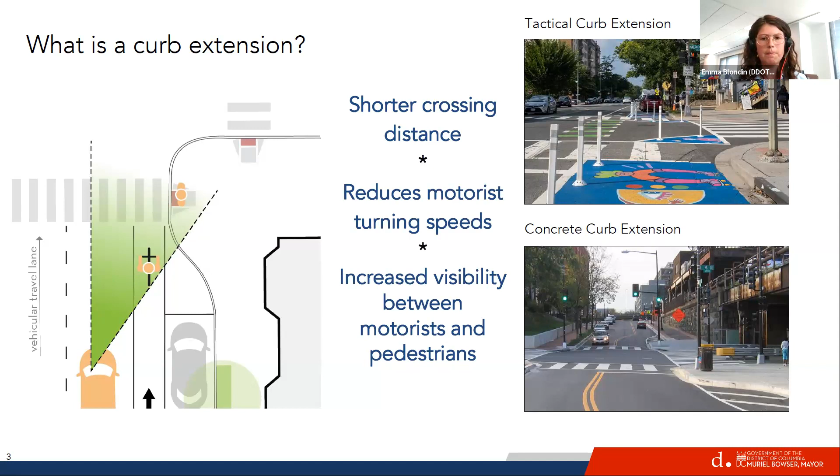We use tactical safety improvements in general, and curb extensions, because we're able to realize the safety benefit quicker, and it improves the planning-to-construction timeline, which I'll talk about shortly. It also gives us an opportunity to right-fit the designs and make changes before we go in with a permanent installation.

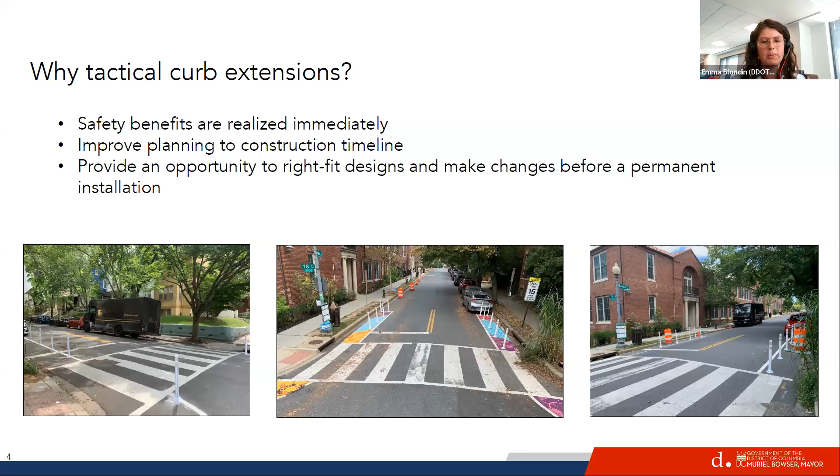So we have these safety and mobility studies, which we do in all different areas within DC, at our smallest local level, where we look at locations on neighborhood streets that can benefit from safety improvements. These are quick, short studies where we recommend a variety of safety improvements, mostly at the intersection level. With each study, we look at 40 short-term recommendations that we implement within 3 years. 10 of those we implement during the study. And a fun extra benefit is that 5 of these immediate installs, we work with local artists to install murals within those curb extensions.

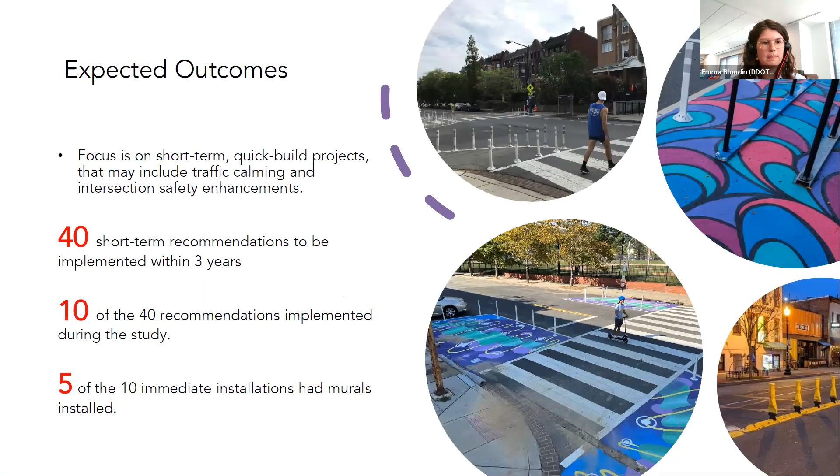And these are all quick-build pieces. So we really message these studies as ways to quickly improve safety along these local streets. These aren't large visioning studies—these are quick studies that identify needs within our streets that we may be able to come back later and upgrade. So they're all created to be tactical installations.

Some of them were able to go straight to concrete, but for the most part, what you see here is what these recommendations end up being: flex post paint, modular speed bumps, signage. One of the big things is bringing all of these intersections we touch up to standards—making sure parking is 25 feet from the intersection, so we're daylighting the intersections. We're making sure we have all the ADA ramps we need, high visibility crosswalks, and other pieces within our design and engineering manual.

Incorporating tactical installations in our planning process allows us this extra step. Looking back at what we used to do, it goes planning, design, and construction. From your original plan and the community engagement, it can be 3 or more years before you actually get to installation. So by incorporating the installation and design piece as part of the planning process, we're able to get to...

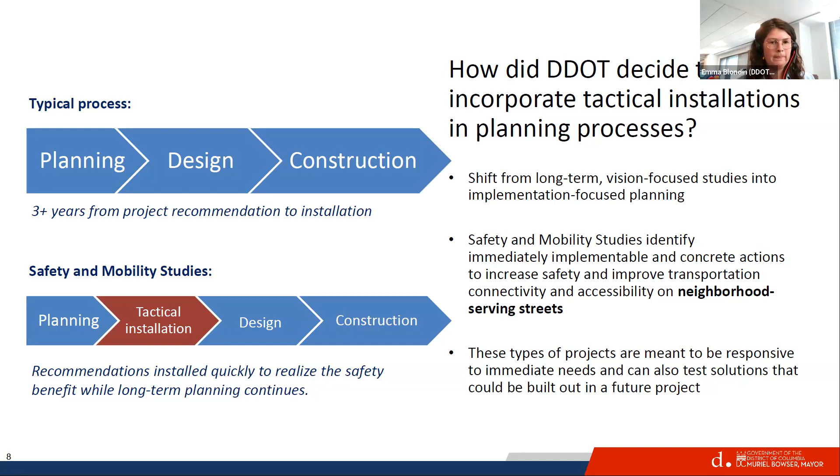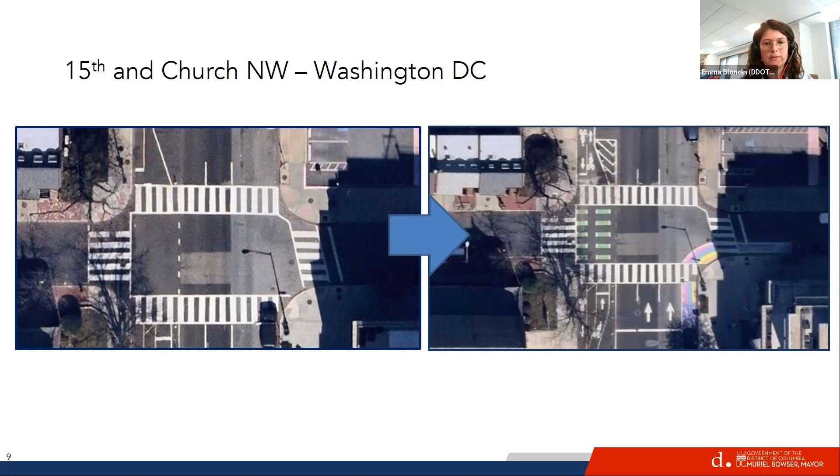In the intersection, we added puppy tracks for the cycle track. This cycle track is one of our oldest in the city, so bringing that up to standard and providing more signage, which you don't necessarily see in this image, and then curb extensions to shorten the distance for pedestrians to cross.

This is another intersection. We have a lot of not necessarily teed up intersections because we have lots of avenues that separate out our grid. One of the key things we do is try to tee up the intersections, which you can see here.

One of the main things that helped us succeed with these studies is incorporating the design process in that planning. So we found a consulting firm that could help assist us with the planning and the design. As part of the deliverables for the safety and mobility study, we had them develop plans that we could pass off to our contractors when we were ready.

That allowed us to install this because we were, as an agency, going and repaving this street as part of our asset management process. As we go and repave it, we had the plan ready, so we were able to execute immediately and upgrade this intersection because we had the plans ready to go. I think that's one of the main reasons we've been able to implement these so quickly, just being one step ahead in the planning process.

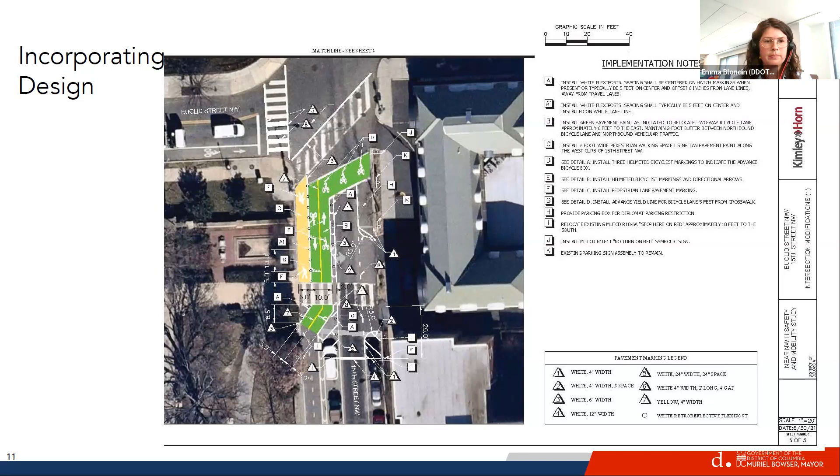You can see here the before and after. This is actually an example that a resident had brought to us, this is a park, an NPS park that didn't have a sidewalk next to it. So we were able to do a tactical sidewalk, and almost immediately people were using that rather than the cycle track to access the park.

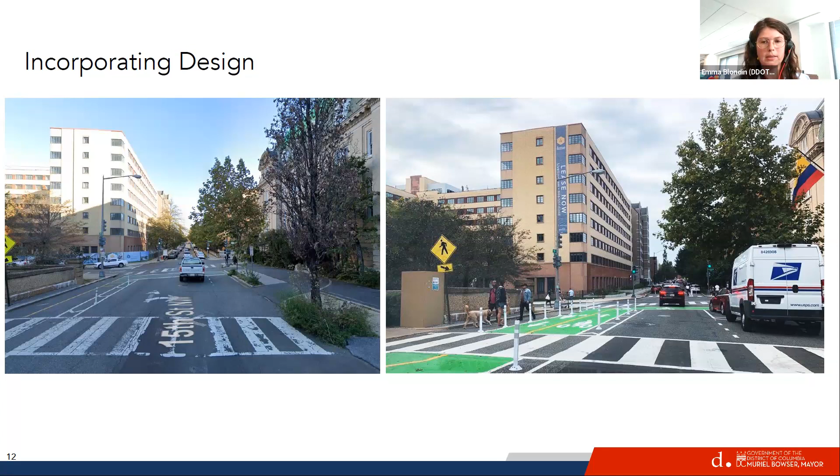After the safety and mobility studies and we install these tactical safety improvements, we realized, as we go to the community and install these, we always say we'll come back with a capital project and harden these tactical safety improvements. But the reality is most of those streets don't get capital safety improvements because these are local streets, local intersections. So we realized we needed to find a systematic way to identify the locations we could upgrade to concrete. That's our Vision Zero hardening program.

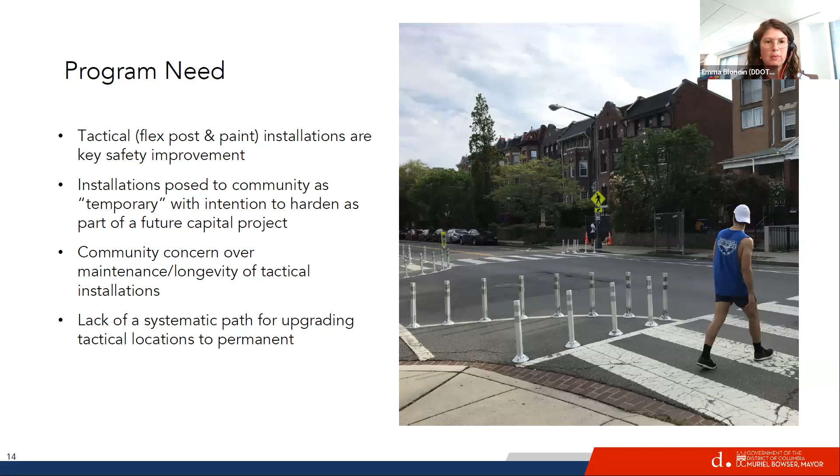This is kind of some of the things I've already mentioned, where we identified over 400 locations where we've put in these safety improvements. We know they provide the benefit, but we're getting more and more community concern over the maintenance and longevity of these. As you can see, some of these flex posts have seen better days. So being able to find a systematic path for upgrading locations is something we kind of started tackling in the past couple of years.

It was also brought to us through the council, so we are required to identify these locations, provide targets, and report on how many locations we upgrade. This includes upgrading temporary or typical bike lanes to protected bike lanes, as well as bus islands where we have both buses and bikes on the same corridor. It's really about what materials we're using and how we can upgrade them from temporary materials to more permanent ones.

In 2022, we applied for TAP funds, the Transportation Alternatives Program, to do a study to identify how to upgrade these locations. We really looked at the methodology and how to identify locations that could benefit from the upgrading. They're also assisting us in developing concept designs for some of those locations that rose to the top of our list.

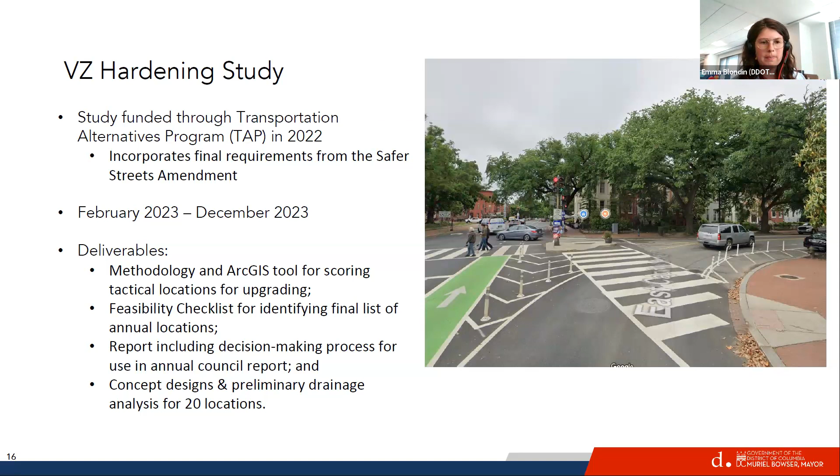So the site selection for identifying the top locations - we have over 400 locations. Each of these intersections gets a score based 50% on the need for safety improvement, and 50% on the benefits that safety intervention will have from being hardened. The safety benefit is already there, but what locations will benefit from us making that concrete?

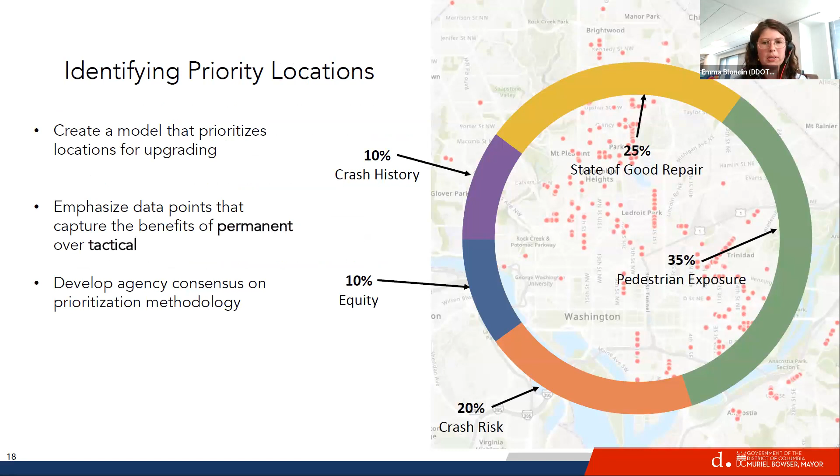These next ones we can go through quickly, because this is just explaining the prioritization score. We looked at state of good repair and pedestrian exposure. State of good repair is really about which locations would benefit from getting hardened based on how old that location is, how old that improvement is, and how many 311 requests we get for fixing the flex posts that have fallen over.

Then we have pedestrian exposure. This is basically trying to get at our pedestrian count. Since we don't really have a good way to count that, we looked at AADT, we looked at public transportation - if there's a metro stop there, that's a big pedestrian generator. We looked at other pedestrian generators as destinations, vulnerable road user destinations - schools, senior centers, hospitals. We looked at trail entrances, and lastly curb to curb width, seeing how long a pedestrian has to cross the travel lanes to get to the other side.

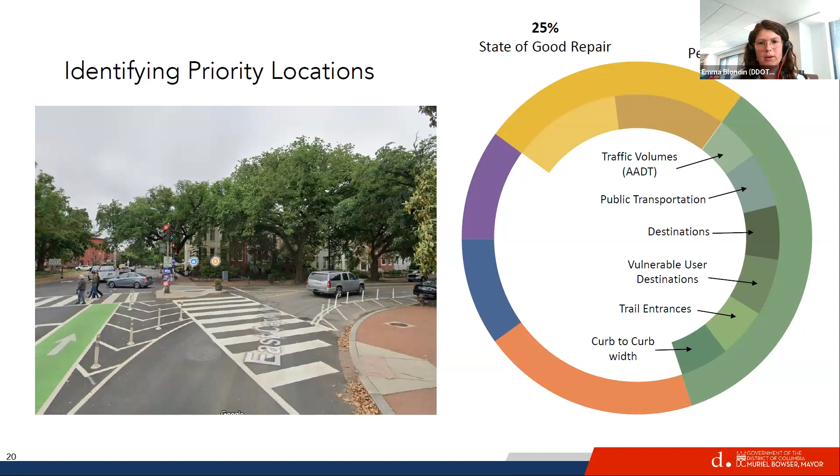Then crash risk is part of the roadway characteristics. So looking at how many lanes of travel are in the same direction, that's getting at the multi-threat crashes, looking at speed limit, intersection geometry - if the intersection's skewed or complex like the one shown here - and then intersection control, if it's a signal, a stop, or uncontrolled.

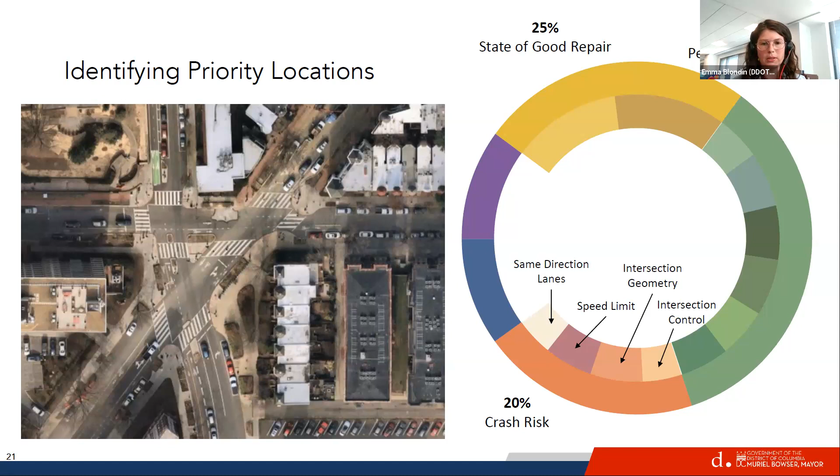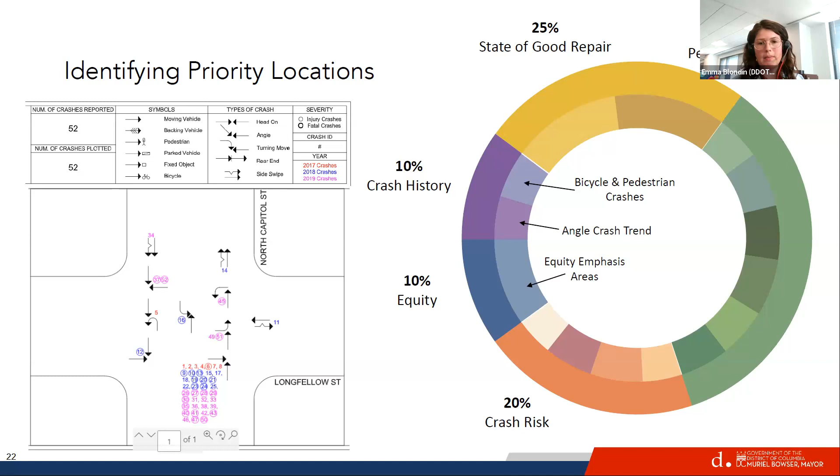And then lastly, looking at both equity - we have equity emphasis areas within DC that are identified based on a variety of needs, looking mostly at transportation needs. And lastly, looking at crash history - angle crashes, which can be addressed most easily by these safety improvements, and then bicycle and pedestrian crashes as well.

That's once we calculate the score. This is something our consultants helped us create a tool for in ArcGIS. We calculate the score for each of the locations within our inventory, and it generates a prioritized list.

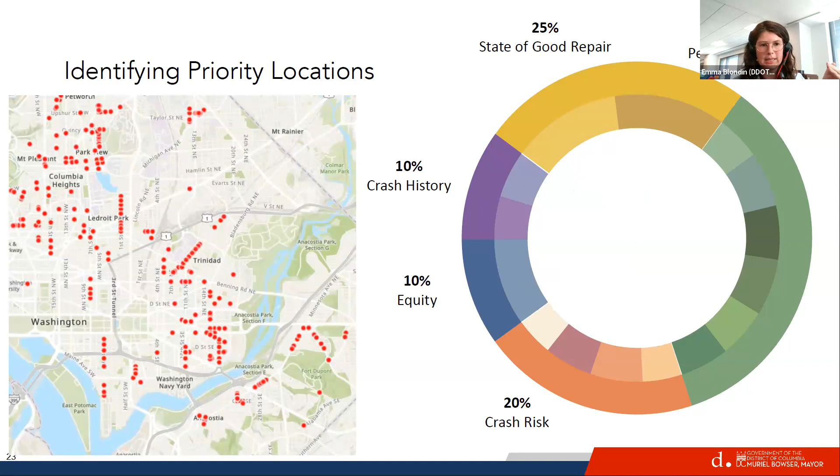If you go to the next one, the prioritized list we take through feasibility. We make sure we're not working on any other studies at that location - is that intersection part of an ongoing project? If it is, are we able to incorporate the hardening as part of that project, or can we do the two side by side? There are a lot of locations identified for future projects where we haven't started planning yet, and if it's on one of those corridors, we don't upgrade it - we leave that on the list for the following year.

That's because we have a lot of other needs for this curbside space. If it's identified for a bike project, we may be putting in a protected bike lane, or if it's identified for a bus project, we may be putting in a bus lane. Both of those use the curbside, so we don't want to harden something that could preclude those future improvements. That's another benefit of using these tactical safety improvements in the meantime - we can get that safety benefit now while going through the planning and design process for something that may use that space later. After that, we make sure the trucks can make that turn.

A lot of the places where we've put tactical safe curb extensions, it's because we want to visually narrow the road and slow down cars, but trucks may not be able to make that turn. So we don't have the flex post, we just have the striping to provide that visual narrowing. We want to make sure vehicles can actually make that turn.

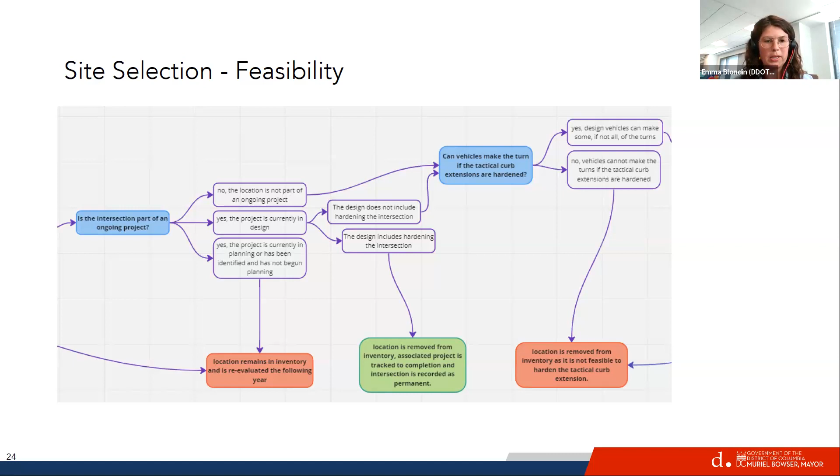If the location fits these two feasibility categories, we can move on and identify the complexity. We're currently working through a checklist looking at complexity so we can understand how complex the project is. We're an old city, so we have utilities everywhere and a lot of conflicts, different ages of utilities and signal infrastructure that we'd have to upgrade. The complexity checklist is basically seeing how expensive and time intensive a location would be, making sure we're getting the benefit out of it. We don't want to go through an extensive design process for a location where we're only going to be able to put in 2 feet of curb extension. This checklist helps us identify those locations.

Then we take the top 20 locations, and this is the art piece of it where we identify a well-rounded work plan for that year, where we may have some really complex intersections and some smaller, simple, low-hanging fruit ones. That's what we report on. The locations that don't make it each year go back into the inventory, and we rerun this whole process on an annual basis.

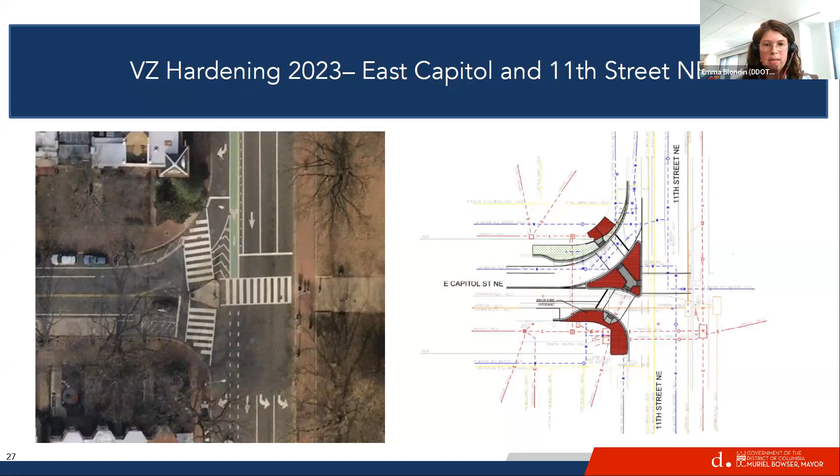These are some of the process pieces as part of our design characteristics. We do have to relocate a fire hydrant, and we have to coordinate with DC Water and conduct a drainage analysis.

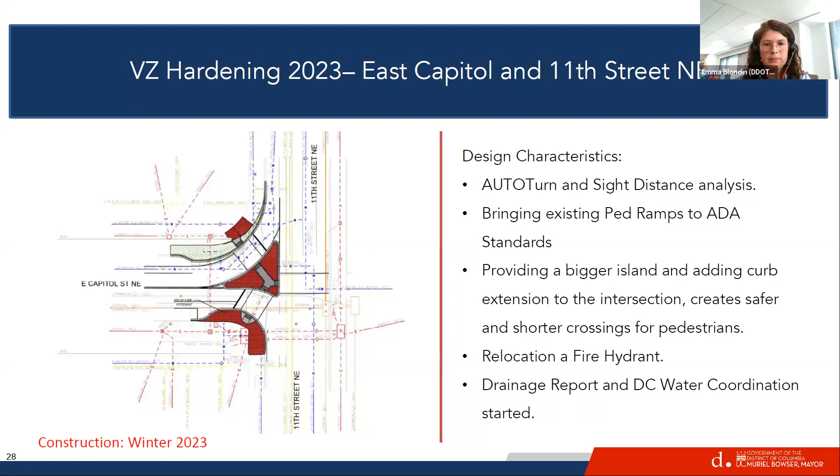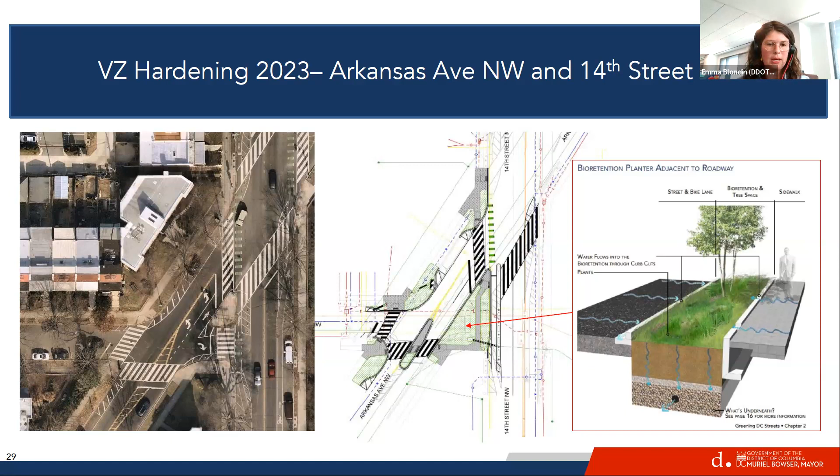Another example is Arkansas Avenue and 14th Street Northwest. This is one where we're able to put in some bioretention because we're closing a slip lane. With locations that have a larger amount of space, we look at other ways to use that right of way to benefit—whether it's bioretention, or working with our park service to facilitate maybe benches or a small park. We're also providing a pedestrian refuge across Arkansas Avenue and really tightening up these lanes.

These are similar design characteristics we have to go through. This one requires upgrading some inlets, which is one of the things that increases the time and expense of these projects.

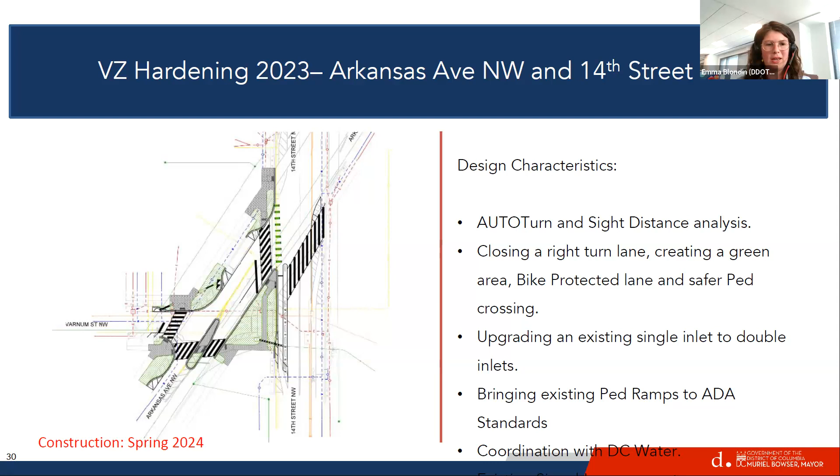Thank you, Emma. Do we have any questions from our audience today?

This is Tanya, I have a question. I think I saw you at the APA conference, Emma—were you there giving the same presentation? I was, yep, this is like the road show here. Yeah, and I may have asked this question then, so I apologize if you have to repeat the answer. But when I've brought up... oh sorry, I think you muted yourself. I don't know why I did that, I've never done that before. When I've brought up these painted bulb-outs that are artistic to our traffic engineering office, I immediately get shot down as it being in conflict with the MUTCD. So I'm just wondering how you've maneuvered that conflict and got your way.

Yeah, that's a great question. When we put in a curb extension, we're considering that no longer part of the roadway—so that's now pedestrian space. It's essentially the same as if we were to put in a concrete one and now it's a sidewalk, except it's still asphalt. By taking it out of the roadway network, we're saying it's no longer subject to the MUTCD, and so we're able to put art in it.

Can everyone see my screen share? We're seeing the presenter side. Hey Charlene, you might have to do it if I can't get it to cooperate for me. No worries, we're happy to help. Oh goodness gracious. Yes, would you mind? So sorry, I was going to try to do it myself. My computer decides to work and then not work lately.

Hi everyone, in case you don't know, I am Jessie Bialek. I am the bicycle and pedestrian planner here at Baltimore County. We have been in the process of updating our bicycle and pedestrian master plan.

For some background, we currently have two bicycle and pedestrian master plans: one for the east side of the county, written by the Department of Planning in 2006, and one for the western side of the county, the Western Bike and Ped Plan done in 2012 with a consultant, also through the Department of Planning. So what we decided to do as part of a new initiative is make a countywide bicycle and pedestrian master plan, and also include the rural area of the county, since that was not included in our previous master plans.

This is the vision statement and goals for our plan: increase safety, ensure equity, expand access and connectivity, enhance public health, protect the environment, collaborate with partners, and create economic growth. Our vision statement is that Baltimore County will consist of an active transportation network that is safe and accessible, to improve the quality of life and health for users of all ages, abilities, and demographics.

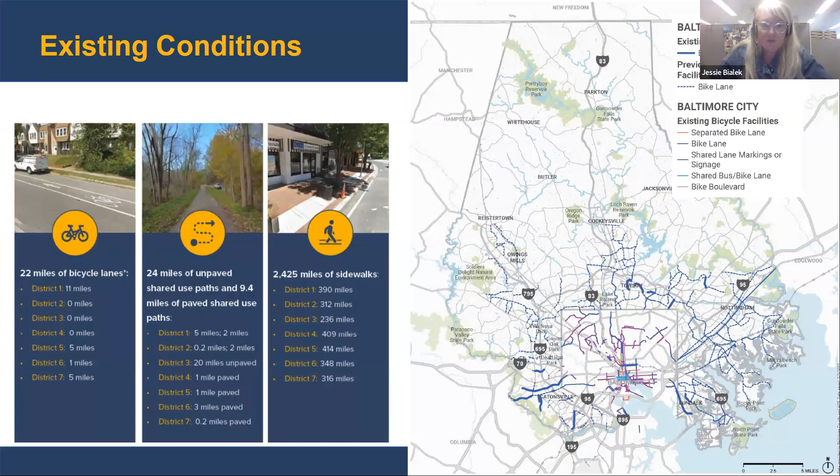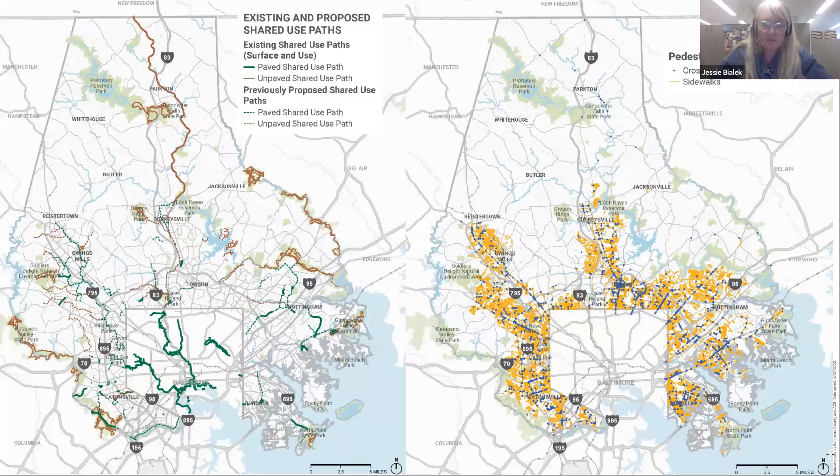This was our network approach, which was much more data-driven than our last two master plans. We took our existing network with its opportunities and constraints and used three types of analysis: demand, equity, and safety, as well as bike share and complete streets. We added those to our online survey conducted with the public, as well as an interactive web map for people to comment on. We also held 7 pop-up events in each of the councilmanic districts, and multiple virtual public workshops—due to COVID, we did not do those in person. Our draft network aims to recommend a connected, comprehensive, low-stress facility for people of all ages and abilities.

The first analysis we used was the demand analysis. The inputs were where do people play, where do they work, where do they shop, where do they learn, where do they live, and where do people take transit. A composite demand score was summarized to show the geographic distribution of active transportation demand in Baltimore County.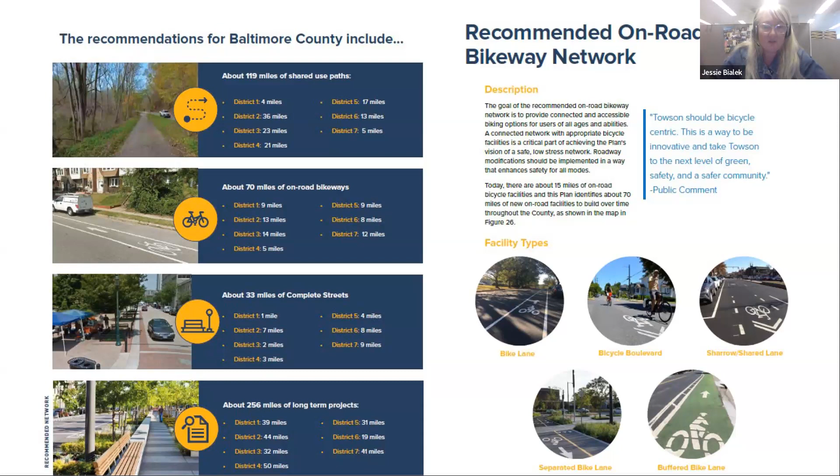This section is about the Maryland MDOT context zones. We met and spoke with MDOT when we were writing the plan to see what their ideas moving forward were for recommended networks, since most of Baltimore County's major arterials are owned and maintained by SHA. So yes, 27% of the overall recommended network and 19% of long-term improvements are located on SHA roads. That is quite a bit, almost a quarter.

What we were told from them is that they are introducing these context zones to prioritize safe access for all road users in areas with the highest concentrations of trip destinations.

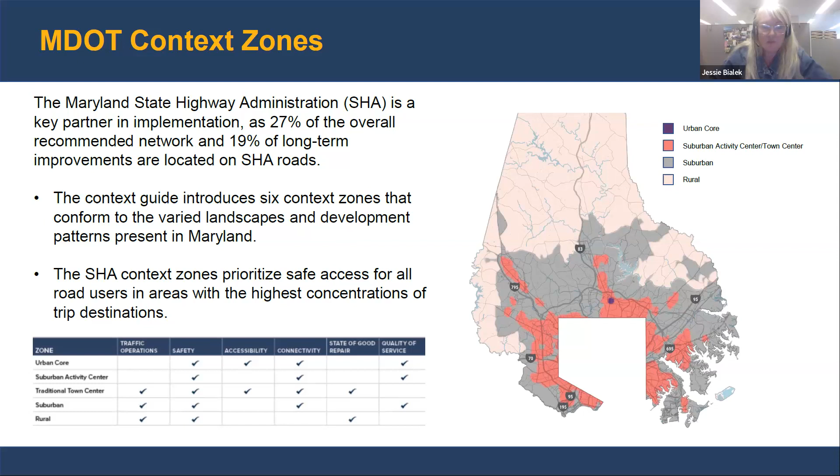So our prioritization approach is to evaluate the network using a data-driven screening process to sort projects by score into high, medium, and low priorities. Review the results within the department as well as with project partners, and then the finalized network segments are completed and categorized into high, medium, and low priority phases, and that is where we got our master project list.

This slide is the bikeway and trail prioritization. The inputs for this were regional connectivity, intersections with high equity and high demand areas, and the number of bicycle and pedestrian crashes. So for tier 1, which is the highest priority, it's 47 miles, tier 2, 244, and tier 3, 110. The map on the right is showing the recommended bicycle and trail phasing, showing the tiers in red for high, blue for medium, and orangish yellow for low.

We also included in the plan community recommendations that weren't necessarily showing up in our data analysis, but were important, and we had a bunch of public feedback on, so we wanted to make sure we included those in the plan as well.

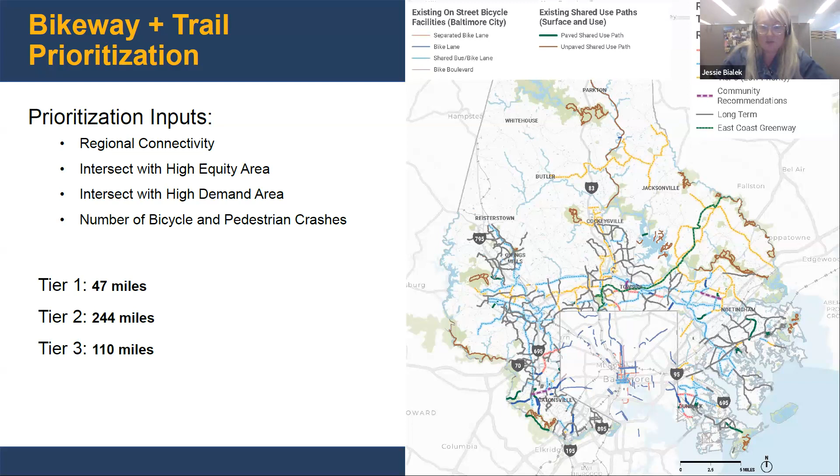This is the complete streets prioritization. The inputs were regional connectivity, an intersection with high equity and high demand, as well as the number of bike and ped crashes. It's the same layout as the previous slide, with tier 1 being the highest at 31 miles, tier 2 at 74, and tier 3 at 10.

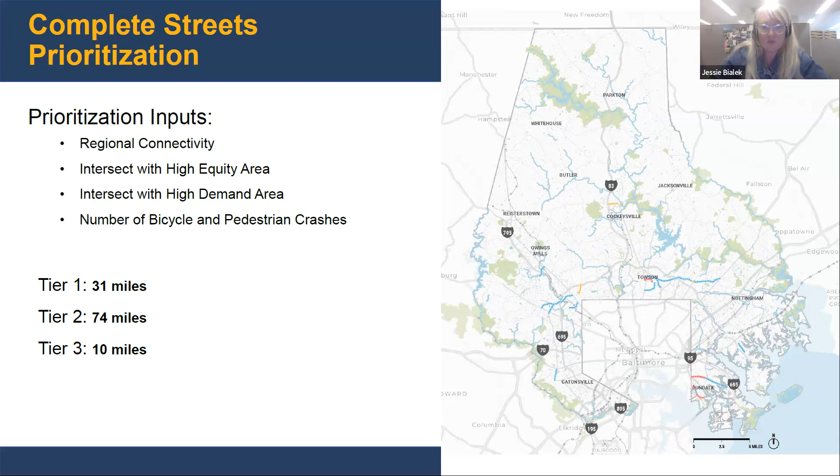So for the pedestrian priority areas, we use prioritization inputs such as sidewalk gap closure, the intersections with high equity and high demand, the presence of dangerous roadways, and the number of pedestrian injuries or fatalities. The pedestrian priority areas are shown on the map, with low being green, medium being orange, and high being red.

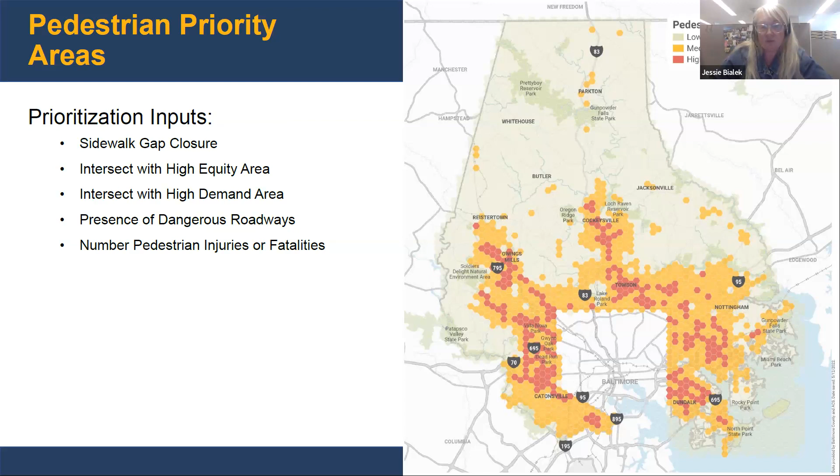This slide shows our implementation goals for the plan. The first being to expand access and connectivity. Our annual goal will be to complete the planning or design phase of at least one tier 1 project, design and construct at least 6 miles of bikeways and or shared use paths from any of the priority tiers, and design and construct at least 2 miles of complete streets from any of the priority tiers.

The other goals are to increase safety, enhance public health, ensure equity, protect the environment, create economic growth, and collaborate with partners.

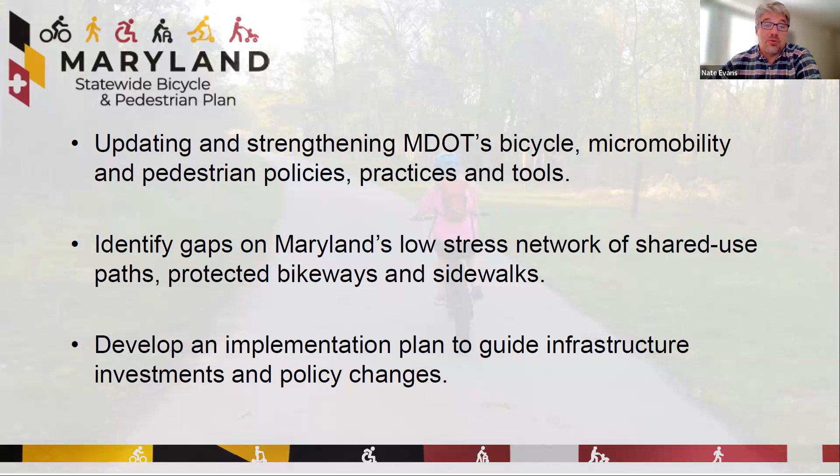This plan is different from previous ones in that we've taken a very data-driven approach to forecasting our bicycle network, due to the effort we did with our bicycle level of traffic stress and documenting our shared use paths and similar facilities across the state. We were able to do our bicycle network analysis, which then helped inform areas to make improvements. This plan also aims to be a guide for infrastructure and investments and any policy changes coming, not only for the state, but also as a sample for our local jurisdictions.

So the plan really kind of started last fall with our consultant selection and organizing of our technical advisory group. In January, we started conducting our existing conditions analysis, and then over the spring we did our first phase of public outreach. Over the summer, we started crafting our policy recommendations as well as working with stakeholder groups to help fine tune where those recommendations were going. We now have the draft plan available for comment through the fall, and we look to have it adopted in January of next year in time for the General Assembly session.

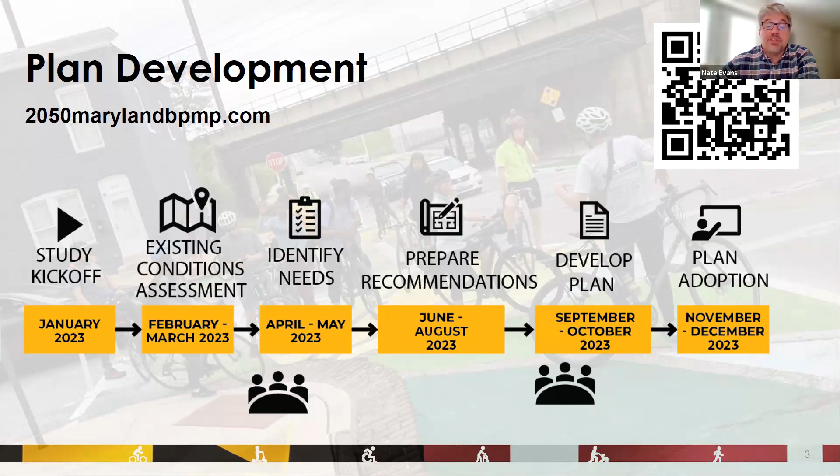Similar to national studies, we're seeing that two-thirds of the population would bike more if they had less traffic interaction, whether it's through the implementation of shared use paths or protected bike lanes. It's that traffic element that's really keeping people from getting on their bikes. Likewise, a lot of folks wanted to see more shared use paths and protected bike lanes across the state.

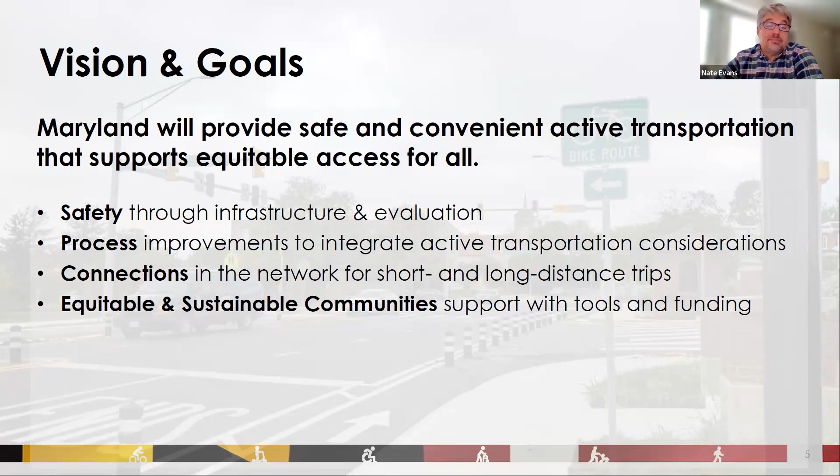One of the goals is to improve safety through infrastructure and evaluation. We also want to improve the process by which active transportation improvements are integrated and considered during project development. We want to look at network connections for transitioning both short and long distance trips, and also provide mechanisms to support equitable and sustainable communities through tools and additional funding. I wanted to hit a couple of the key recommendations coming out of this plan.

So first is that MDOT as a whole needs to update our complete streets policy.

We're in the process of doing that now, and we're also looking to develop a grant program and other funding opportunities to help local jurisdictions implement complete streets policies, practices, and projects in their jurisdictions.

Another key recommendation is to continue building on the success of the Pedestrian Safety Action Plan. The plan lays out where a lot of the state highway corridors need to be improved across the state. While the PSAP provides recommendations, it's actually about going out and implementing it by conducting additional feasibility studies on those recommendations.

We also took a look at updating our state trail network and state trails plan.

Part of our data development for this plan was doing a good job mapping out a lot of the shared use paths across the state. That also showed that most of the key projects from the 2009 strategic trails implementation plan were complete. As new trail ideas and networks have developed over the past 15 years, we wanted to comprehensively look at the next phase of transportation trails on our state's horizon and put together an updated plan to more strategically implement those trails across the state.

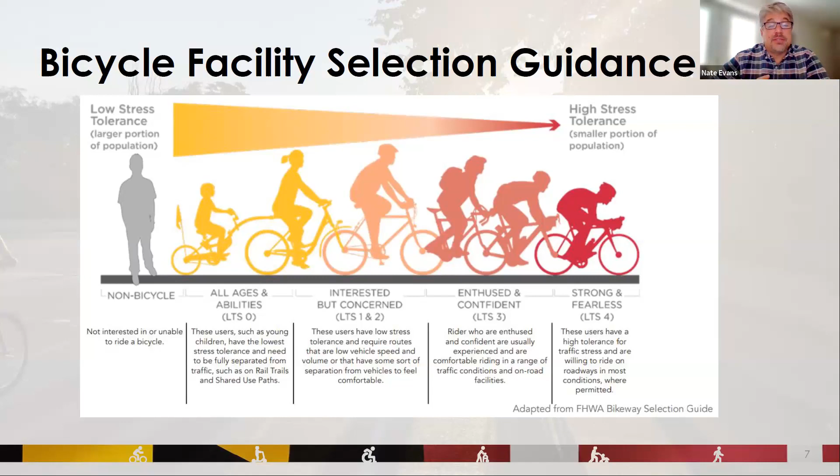Throughout the plan, we expand on the process for how we would want to go about selecting those facilities, but I'll save that for you all and not bore you with it right now, so you can go online and take a look at the plan.

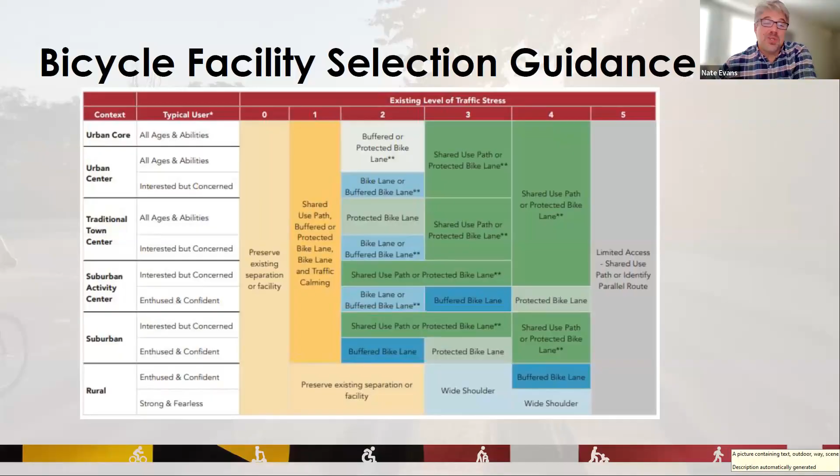The draft plan will be open for public comment now through November 20th, with the final plan being adopted early next year. You can go to the plan's website at 2050marylandbpmp.com to take a look, and at the bottom of each page on the PDF you're looking at online, you can go into a SurveyMonkey link to leave comments on those pages as appropriate.

All the comments we're collecting will be online, and you can also email me with any comments, or send them to the bikepedinfo@mdot.maryland.gov email address. We'll be collecting comments there as well. And with that, I'll take any questions.

Nate, this is Tanya. Did the plan do any analysis of progress made since the last plan? Yes, I should have said that in the beginning. The plan has an opening chapter where we talk about the success stories from the previous plan adopted 5 years ago. We also have a very extensive existing conditions section that looks at both policy and infrastructure, and provides guidance on a lot of the latest equity analysis the federal government is offering as well. Those are the second and third chapters.

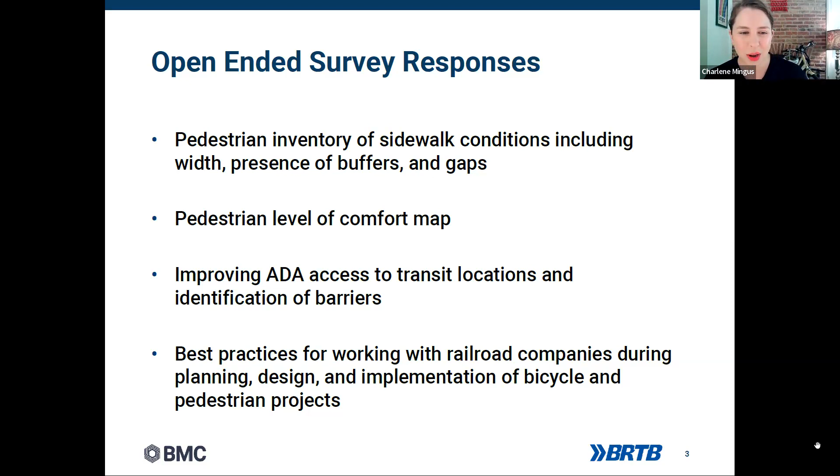Another request was for a pedestrian level of comfort map, which would require that data that was listed. There's also interest in looking at how to improve ADA access to transit locations and identification of barriers, and best practices for working with railroad companies during planning, design, and implementation. Next slide.

We also heard there was interest in following up on the top regional active transportation priorities, including a timeline for construction of major regional projects. Interest in a prioritization tool for projects, so that information can be added and a score provided through a tool. And a project to identify roads for road diets with potential cross sections, including considerations of barriers if they exist. So these are the responses we got so far.

So I wanted to open this up to you all and see if there's anything you're particularly interested about that was listed here. If you had any questions, or if there are other elements you'd like to see BPAG focus on in the coming years.

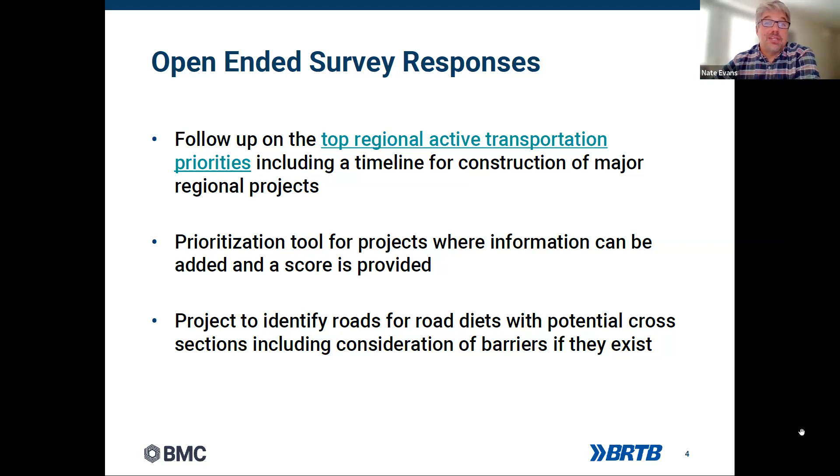Hearing none, we can move down to our next agenda item for the roundtable discussions. This is just a time for our local jurisdictions to provide a quick update on any of their projects in the bike-ped world. We'll start with City of Annapolis.

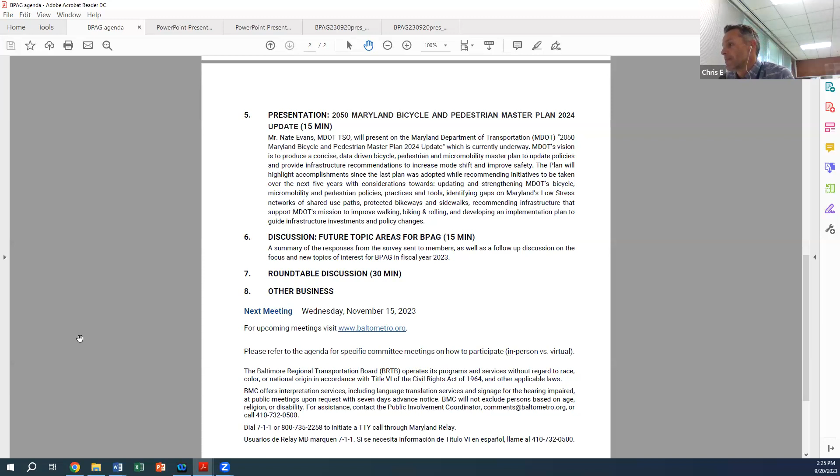Hey, good afternoon, everyone. I'm filling in for Tina James, she's on vacation this week. We continue to review local jurisdictions' comprehensive plans, which may include a chapter on bicycle and pedestrian planning. The regional planners in our office, as well as the transportation planning staff, provide review and comment on each plan sent to the Department of Planning. If you would like to look at the comments we have provided back to local jurisdictions to make these plans, specifically the ones that apply to us here, bicycle and pedestrian plans of greater quality, you can go to, and I'll leave the link in the chat,

planning.maryland.gov/pages/ourwork/complans/viewdrafts.aspx. Again, I'll leave that link in the chat, but it's good to have eyes on the comments that the State Department of Planning is providing back to local jurisdictions. We are not a regulatory agency, we do not fund. So the comments we provide hopefully are carefully thought out and can influence the types of changes that this group and other jurisdictions want to make in terms of providing greater accessibility for all types of transportation users. It starts back, at least for our work here at planning, at those comprehensive plans and what kind of attention and focus bike and ped is being brought to the comprehensive planning documentation. So again, I'll leave that link, and that is it for us.

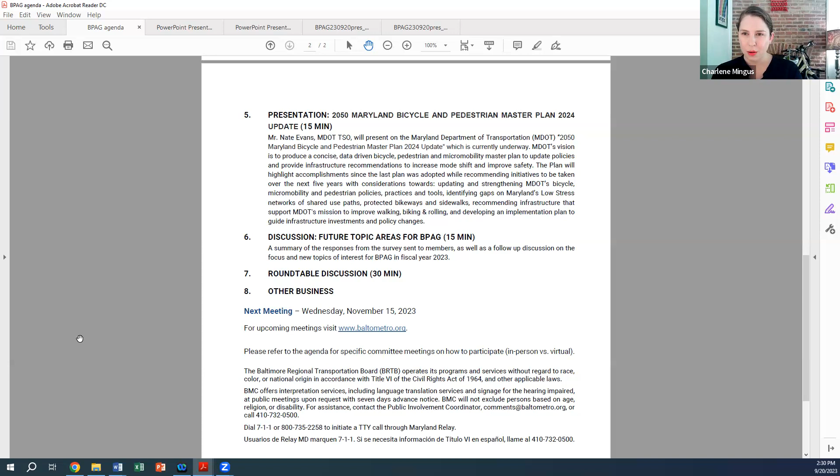As I mentioned earlier, for the Vision for the Regional Bicycle Network RFP, the consultant proposals are due tomorrow, so then we'll begin the process of consultant selection. You've gotten some emails from us about that, and we'll have a few more about BPAG's participation in the project.

We now have an online request form for the Regional Active Transportation Count Program, so you can submit potential count locations at any time as they come up. We're looking primarily at before and after counts. Like Chris mentioned, we did the count before the Montgomery Road improvements were made, and now we're working to schedule an after count to compare bicycle and pedestrian volumes before and after the project.

If you have a potential permanent counter location, that can be a good short duration count location to do for 7 days to see if it's worth putting in something to count every day, all day. Another potential kind of count would be for a safety assessment. I've dropped the request form in the chat.

The period of request for this fall is closed. Unless you have an extraordinary circumstance, reach out to me. But we're mostly looking for potential counts for spring and fall of next year. I'm also happy to speak to anyone who wants to talk further about the count program and ways it could be useful for your jurisdictions.

So I think that is all the updates I have. Shane, did you have any updates about Bike to Work Week or anything? I do not at this time, no. Great, thank you so much.

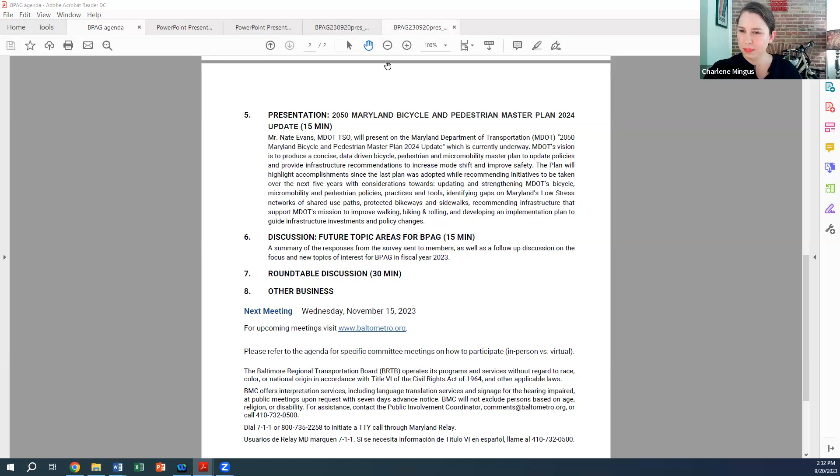Thank you, everyone. That wraps up our updates. Is there any other business for the committee, for the group today?

Nate, I forgot to mention, we have a new staff member, James Kitchen, in our office, and he's on the call today. I wanted to introduce him as a new member, in case he ever needed to fill in, so you all could meet him. James, did you want to say anything about yourself? No, I've been working with the county for 5 years or so, doing special projects part-time for the county executive, and now I'm here in transportation as a new member of the team. So excited to be here, love this kind of work, and happy to learn and collaborate with you all. Great, welcome James, thanks for joining us.

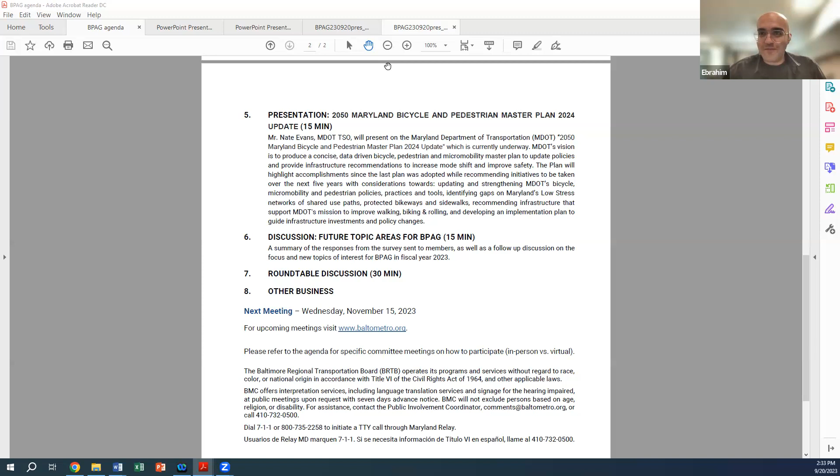Speaking of new staff, we also have our new intern from the University of Maryland, Ibrahim Syed Ibrahimi, joining us today. He's also on the line. If you'd like to introduce yourself, Ibrahim. Hi everyone, my name is Ibrahim. I'm in my Masters of Community Planning program. Happy to be here, I'm excited to be involved in this project. So yeah, that's all for me. Great, thanks.

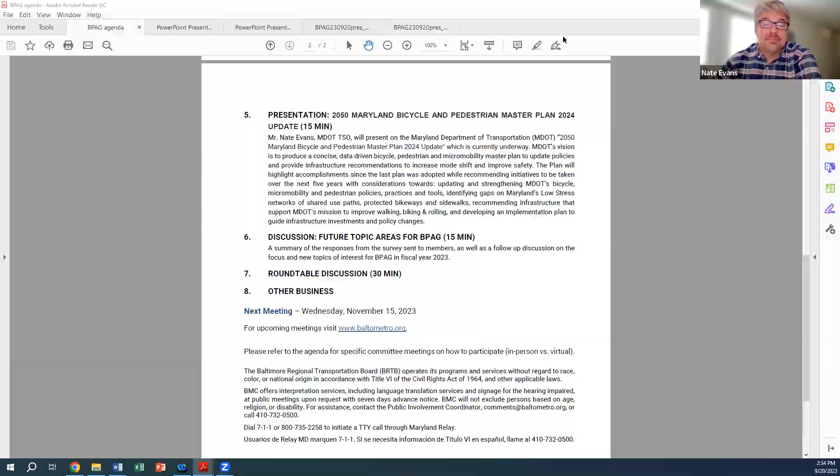Thanks, everyone. Thanks. Thank you, everybody. Thank you. Patrick, are you still on?

Patrick McMahon? Yeah, I just saw your chat and wanted to say I updated that we got 6.4 million for the construction of the extension this year. Yay, wonderful, okay, all right. Thank you for your support. Bye, you all.